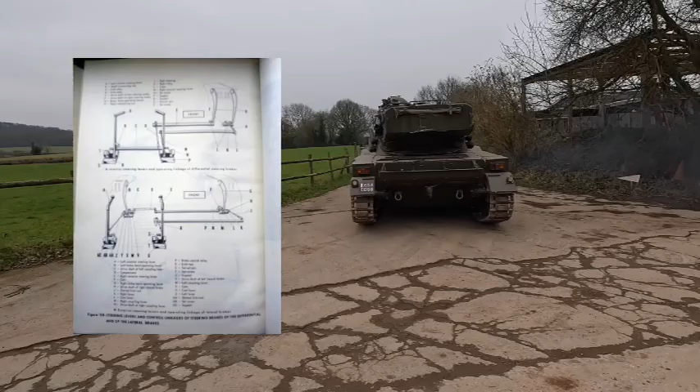What we need to do is to adjust all of those so they're all working in sync, because at the moment there's a little bit more happening on the right hand side than the left. It means that you couldn't just jump in this and drive unless you've been in it a lot of times already and understood how it works.

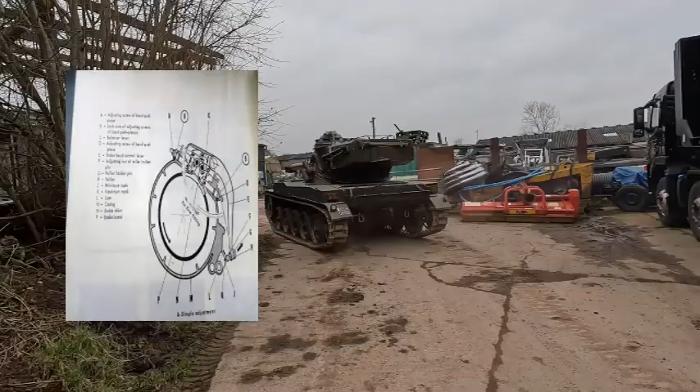So we want to share it around and let people have some fun in it, so we want to get those brakes absolutely bob on. To do that, we have to have a look at the controls over the braking, which are down in here. So this video will be us working on these and balancing them out. On the outside is the lateral, on the inside is the differential, and again we have the same over here on this side.

To do all of that, we've got to lift this main cover, we've got to remove this so we can get to the back of these bands, because you adjust them on the front and the back to get them to brake evenly. Otherwise you'll find your brake harder moving forwards than you do backwards and vice versa, and we just don't want that. All needs to be balanced.

First things first though, get this enormous gun out the way, because you can't lift any of this until that is removed or to one side. So let's get the forklift, go in, we'll get some straps around this and get that out.

First thing is, find out where we're going to place it when we've taken it off, so we can put it down nice and gentle.

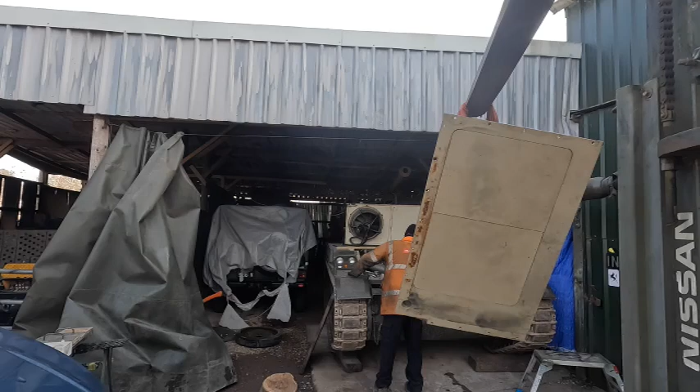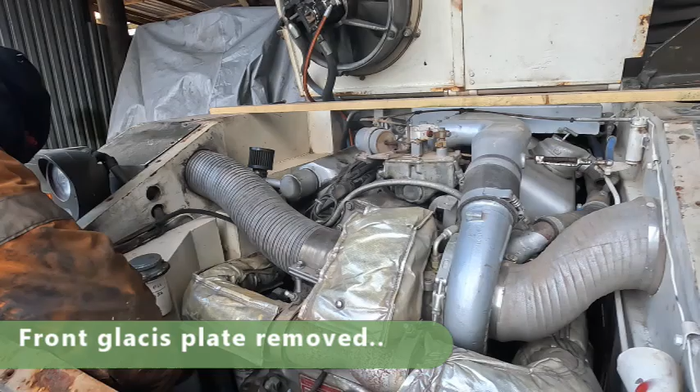The central nut's completely inside of it. It's fell out. Oh, it's inside. That's inside, guys.

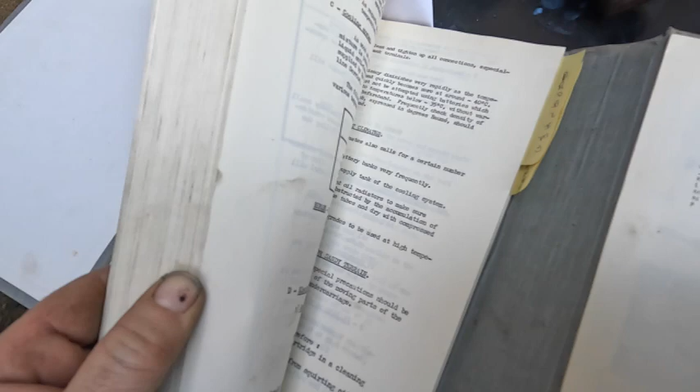So we have the pictures on one side, which is great, and then obviously we have all the specifications and text on the other, but this is a direct translation from French, so the sentence structures are quite a challenge. It will say things like tighten bolt A, so you go and do that, and it says, but don't do that until you've tightened bolt B. So it's sort of written back to front, the sentence structure. You've got to read the entire sentence before you start doing anything, which is probably good practice anyway.

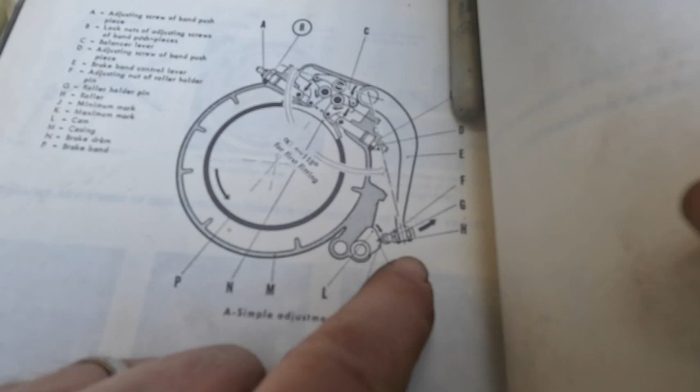So here's the design of how the banding brake works. Here's the band on the inside. Here's the lever that actuates it. And you've got a balancer on the front and at the back, and that then pushes or pulls to make sure that this band is centralised and comes on evenly.

Never great trying to understand these. Look at that there, adjusting screw of band push piece. Yeah, it's pretty a challenge to try and understand what they're actually on about.

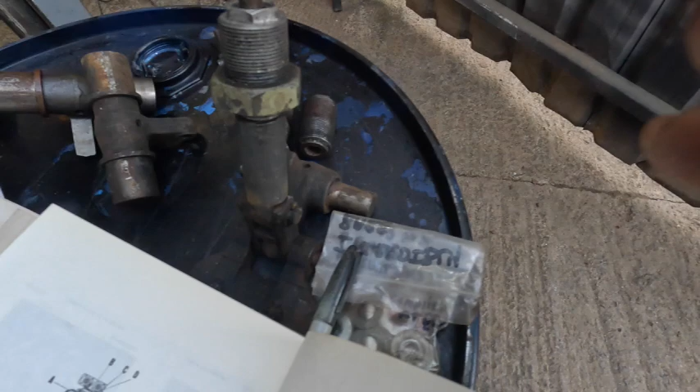So what we've done is, here we have some spare parts. These are inside, and these act on the brake bands. There's a little dowel that goes through that actually goes into brake bands, but basically these are inside, and then what you have is one of these, and this actually moves in and out, and that tightens them up. There is a combination of, this is a tightening screw, this whole assembly moves, then you've got a nut on the end, and this assembly here, here's one here, and you can see design flaw number X, and that is, these just get water inside of them and they rust.

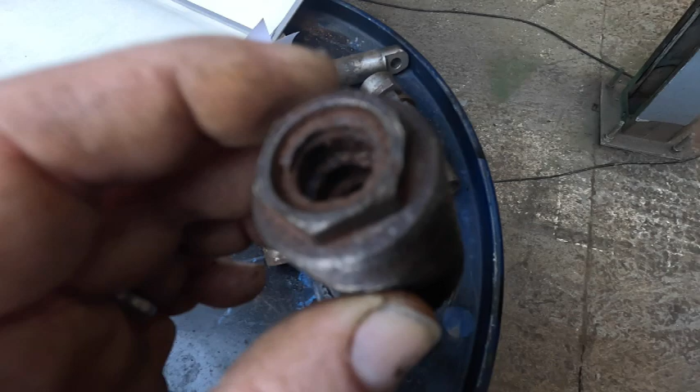Once they're rusted solid like this, that means there's no adjustment, so when you're putting the brakes on you're actually doing it quite a disservice. Now we've worked a little bit on this, and we can see it is actually spring loaded, but look at the rust inside of there. And that's because they actually sit facing upwards at the front of the engine.

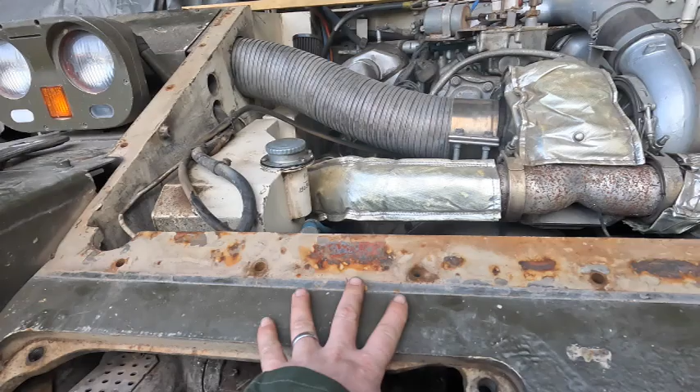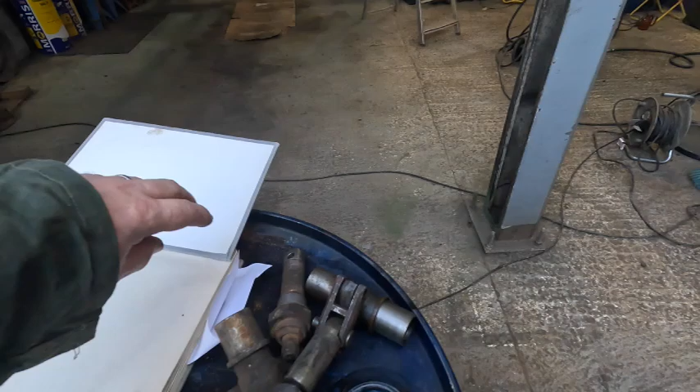So as soon as the rain comes down, it hits here, it runs down, it goes through the gap, and then it drops onto the tops of these. Now, French thought that through. They thought that's no good, that's going to rust if we allow it to do that. So they were very good, and they put caps, which I now need to try and relocate where they've gone.

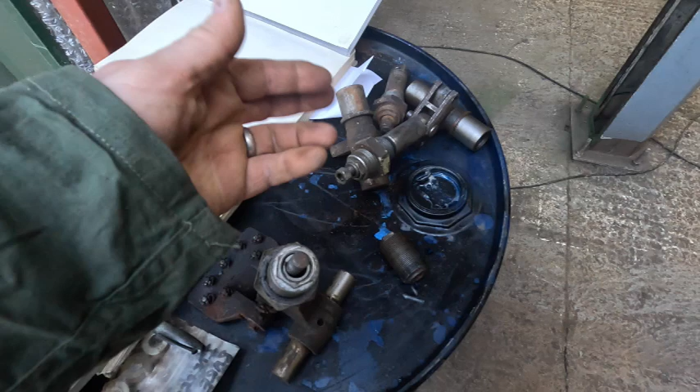Basically, we were here a minute ago. So there's actually caps that go over these rubber ones. I think it was steel ones then covered in rubber. But what happens is, out in the field, you go to adjust these, take that off, drop it on the floor, it's gone. And so these end up exposed.

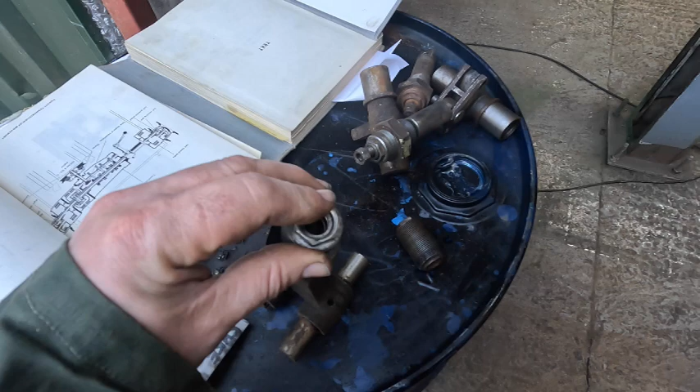So nearly all tanks that I've seen, these are exposed at some point and the water just gets in there and absolutely mullers it. Should be nice soft movement like that, you see. This one's not in bad condition actually. I think about using him, but this was off of a tank that was very much worse for wear. We actually cut the thing up in the end to try and get all these bits off of it. Okay, so onwards and upwards.

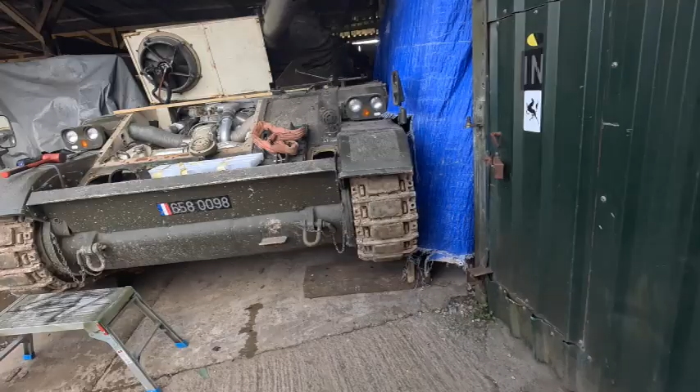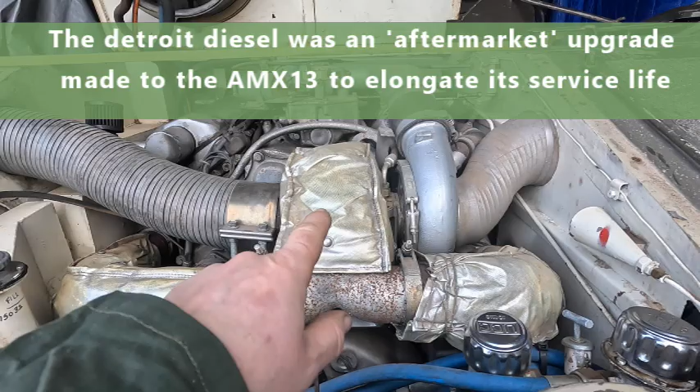We've got the front glacis plates removed. You can see the Detroit engine in all of its glory. This is the turbo over here, and this cladding is to stop the heat affecting the engine because it is sort of jammed in there really tight. Reservoir that feeds up to the fan and that keeps it cool, expelling the air outwards. And we've just got the various dipsticks and filling.

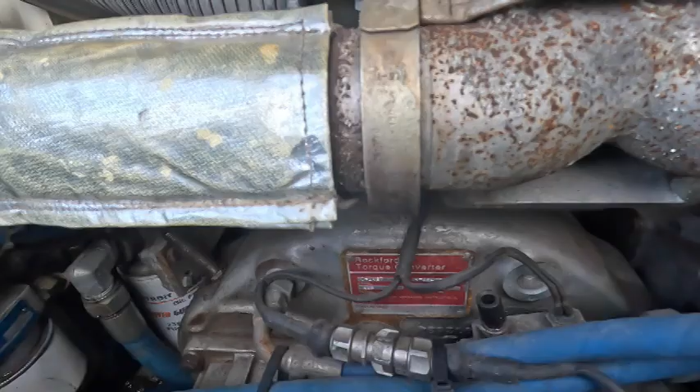You actually see the Rockford torque converter down the bottom because this is an American engine. So as I said, Detroit diesel and the Rockford automatic gearbox. So great fun to drive.

So upon investigation, let's have a look. What we've got is this plunger is actually seized in the housing. So I think that was more or less what I was saying at the beginning of the video, is they're not very well designed, so I think I've guessed it right. So here's the plunger, and that is sat or stuck. Push it out, in and out, in and out, and eventually we might have to disconnect it.

There's a split pin in this end, take it out and clean it up on the wire wheel, some copper grease in there and put the thing back together. Make sure we put those caps over so this doesn't happen again.

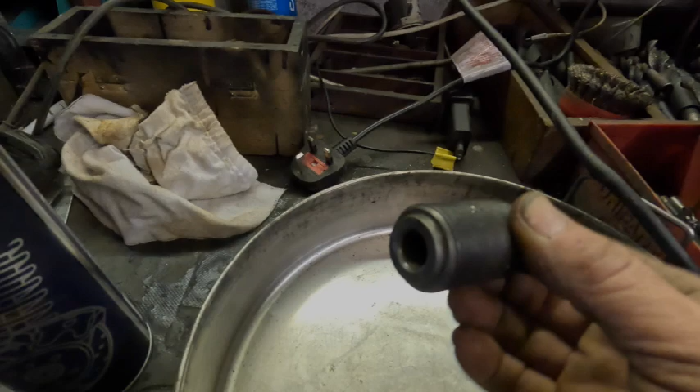So I think most AMX owners are probably going to be coming up against this either now, in the future, or grappling with it at the moment, and that is your brakes locking on, or in this case actually locked off. Let's crack on. Here's the brake adjuster, very simple, hollow, there's a spring in there, put back in a minute.

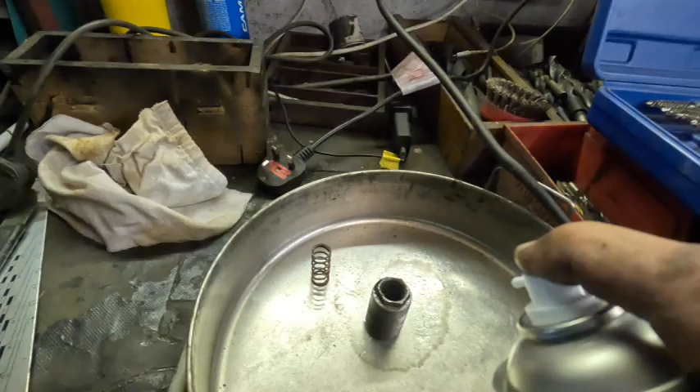Inside of it, you can just about make out on the camera's actually some rust, so cleaner, this is wonderful stuff. I'll give it a quick clean and then we'll use one of these wonderful little wire brushes here and we'll pop that inside and clean out the inside.

A bit of copper grease when we put the thing back together, and that is a little bit on the worse for wear. It got wet in there, hasn't it? Yeah, it's corroded up. That's all.

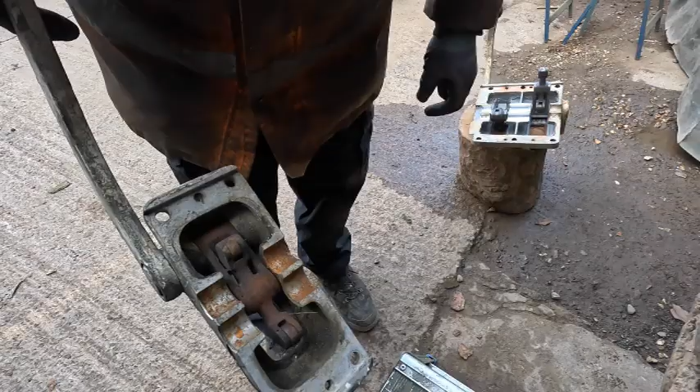We're gonna have to get all that apart. Yeah.

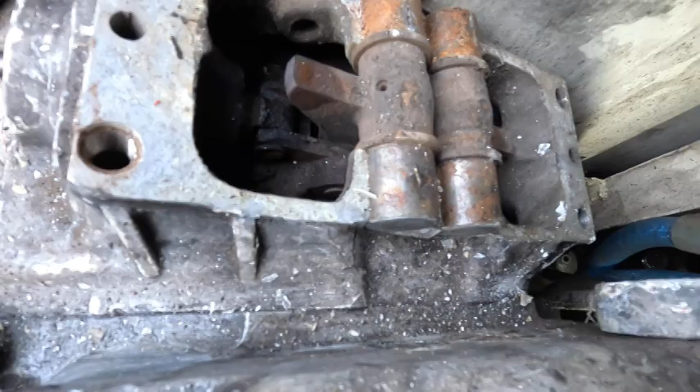There we are, these are the rockers, isn't it? Well, not moving at all, so we need to lift these. We've been on it a few hours now, and we've only done one of the brakes, one of the lateral brakes.

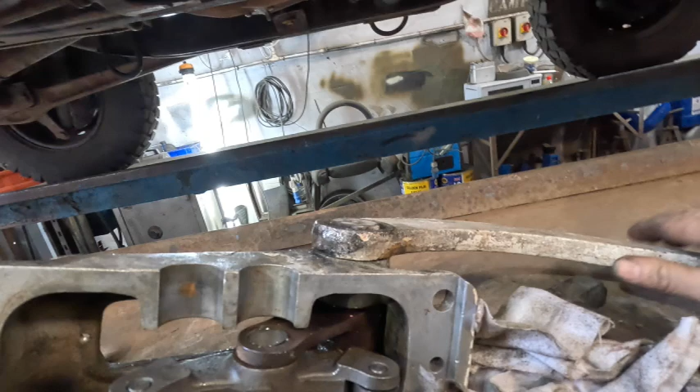It was absolutely seized solid. Don't know how it was working back in the day. This is the actual arm that operates the brakes. That's nice and freed off now. There's a rocker.

This wasn't moving, this is the original, it's just rusted solid. So we've got a nice new rocker in there, and then we've got these little bearings on the end that turn nice and freely. So all of this is completely clean and like new.

This is what came out of it and took absolutely ages. It was horrendous, and that's just taken hours. So now we need to go and clean out the bores that the pistons go inside of.

Doing the brakes on a tank, what do you think would be the smallest tool you would want to use? Yeah, it's come down to it - a Dremel, believe it or not. We need to use this sanding disc on the end, and that needs to go into the bores and clean it out to allow the pistons to go in and out and the brakes to operate correctly. So we're going to have to set to an entire 15-ton tank with a little Dremel.

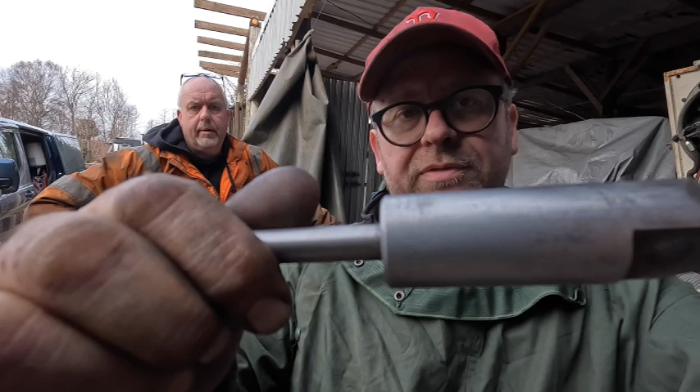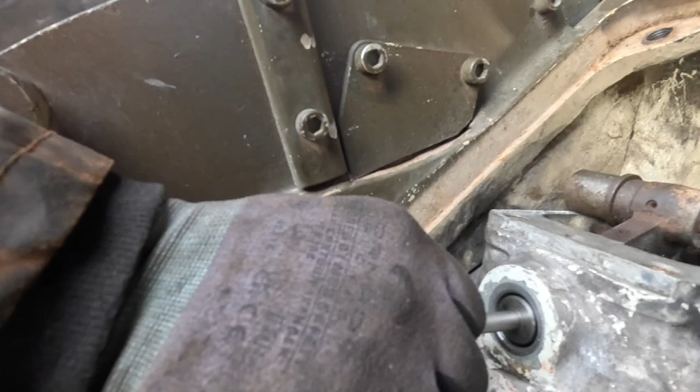So these are the plungers that go inside the casing. You can probably see on this one there's a bit of corrosion at the bottom, which means it's just changed the shape very slightly, which is making it stick. So we've had to put in another - oh god no, hang on, I'm picking out all the wrong ones now. And now here we go, and now that's been polished, lubricated, and that brake should now work properly.

Goodness me, it's been a few hours, but we've got there, and we've got to do the back now, because there's two of them, one here and one over there, and then this brake we can tension.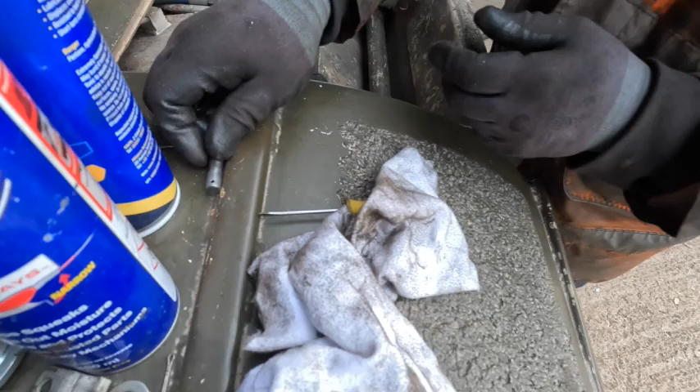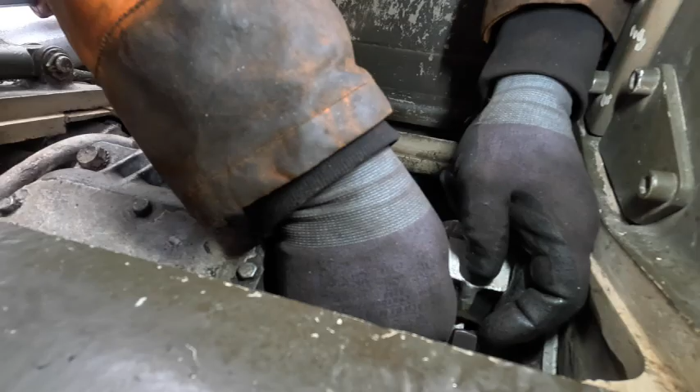You've got to lift that up there, get the clevis started in there. Get some light on the top. Get that started in there. There we go.

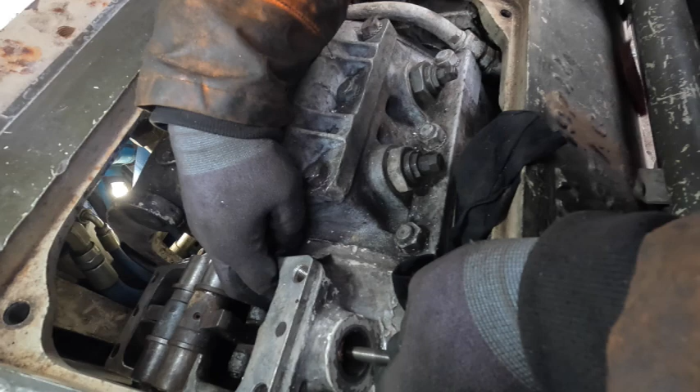Jez is down the front, putting the plungers back in on our right side lateral brake.

So here we are late into the afternoon and we've only got one side done, so we've got the other side to do and then the two diffs as well. So it's going to be... I can't wait. He's loving it down there, but at least we know what we're doing now.

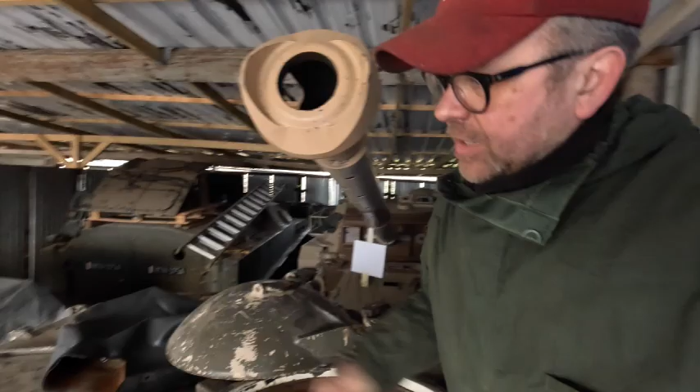Meanwhile, while Jez is up to that, we have to look after the batteries. So I've got a battery conditioner here and we've charged that in these AMXs. There's 4 batteries, 2 12-volts over the bottom of the chassis on that side, and I've got 2 over here. That makes the vehicle 24 volts, but has 2 banks of batteries. One is for the engine and the running, the other one's exclusively for the turret. So the turret batteries are what power the hydraulic pack, which then moves the gun around. We need to have those batteries in tip-top condition if we're to move the turret. And the whole lot is charged by a single alternator, so it's worthwhile conditioning these batteries, a couple of trickle charges over a few days just to top them right up.